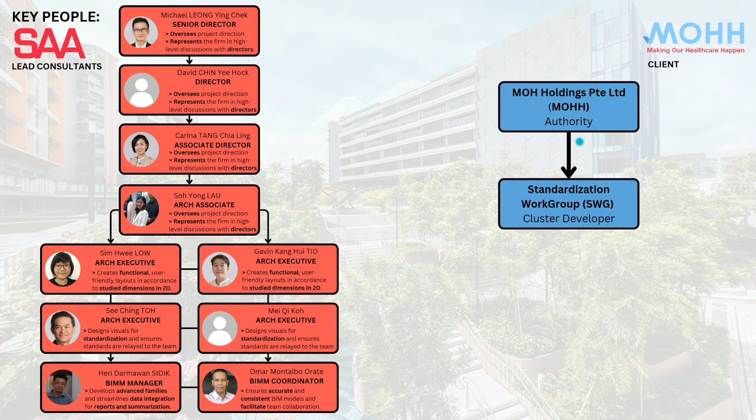As for the clients, we discuss the project timeline with the lead consultant. Considering multiple phases, these are the three key milestones: approval from the authority, review by the cluster developer, and finalization with the future developer.

In summary of the project tasks completed for standardization, firstly, under MOHH, we are tasked to extract out the different BIM models provided by various contractors through reference to Woodlands Health Campus with all the documented equipment.

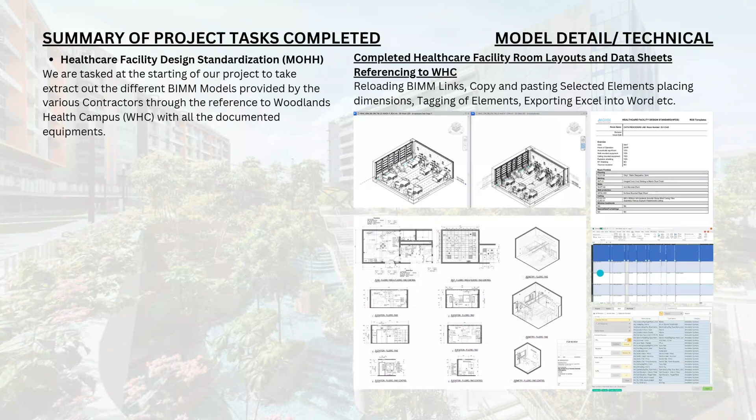This includes completing the room layout and data sheets referencing Woodlands Health Campus, utilizing different technical knowledge and additional plugins to increase efficiency, and creating an overall door schedule for different rooms, contributing to the master schedules.

With all the existing equipment in Woodlands Health Campus, I assisted the BIM manager in consolidating door schedules from Revit files into an Excel sheet, aligning with door code standardization, which will eventually be used for tracking and verifying room changes in later project phases through various discussions.

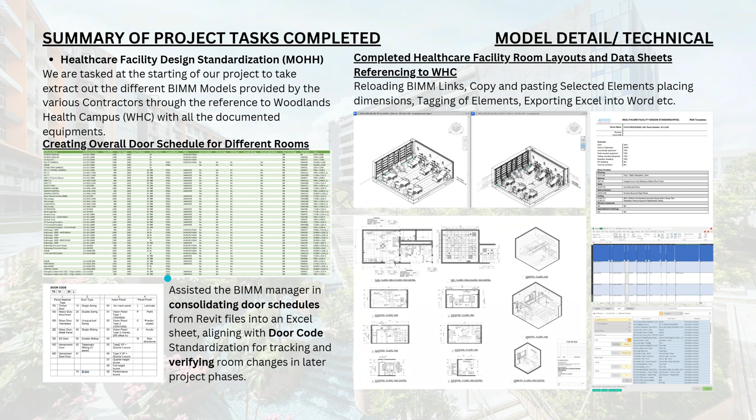After addressing MOHH's requirements, we move on to addressing the three cluster comments from each respective doctors and nurses. The three clusters being National Healthcare Group, SingHealth, and National University Health System.

Firstly, cluster comments were provided and consolidated by us. We then discuss with MOHH by providing them with different options in order to see which layout will be able to address most of the cluster feedback.

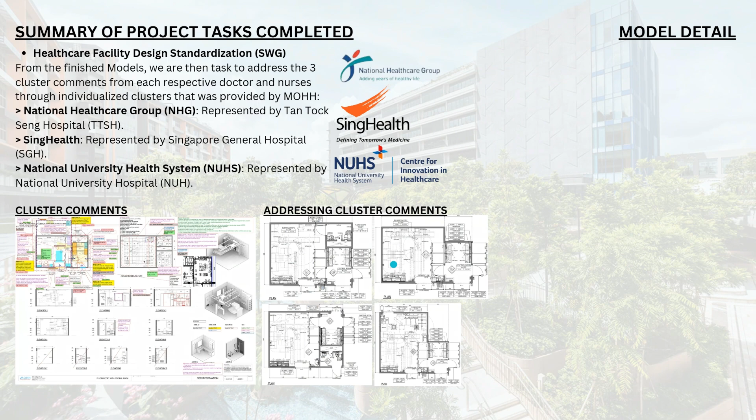And finally, we'll be presenting to the SWG regarding the key comments we have observed from the cluster comments, followed by our major changes.

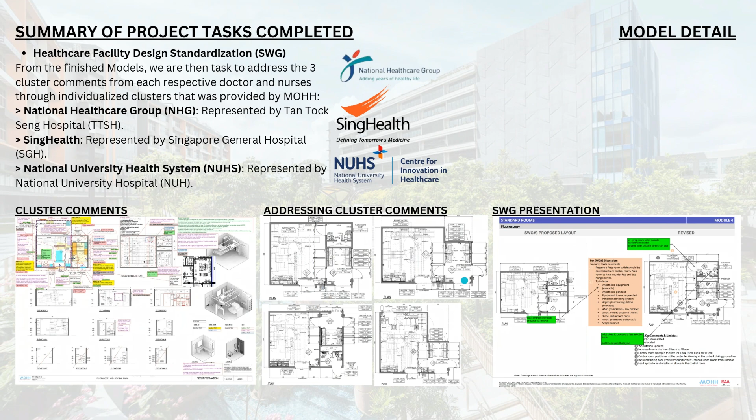At the same time, we need to adhere to each standardization provided by us. Since my internship did not cover the SWG phase, I focused on key standardization theories in hospitals that stood out to me. Firstly, the door usage in hospital facilities.

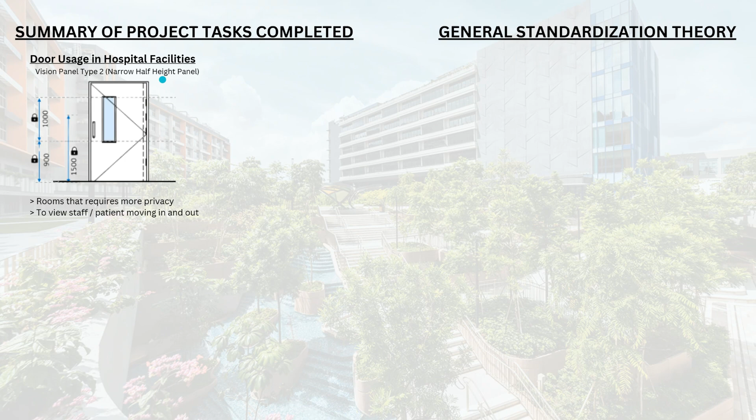Vision panel type 2 is used in rooms requiring privacy but allowing visibility in movement, such as Class A 1 bedrooms, while Vision panel type 3 is used in high traffic areas which require more monitoring, such as Class A ISO-B isolation ward for infection control.

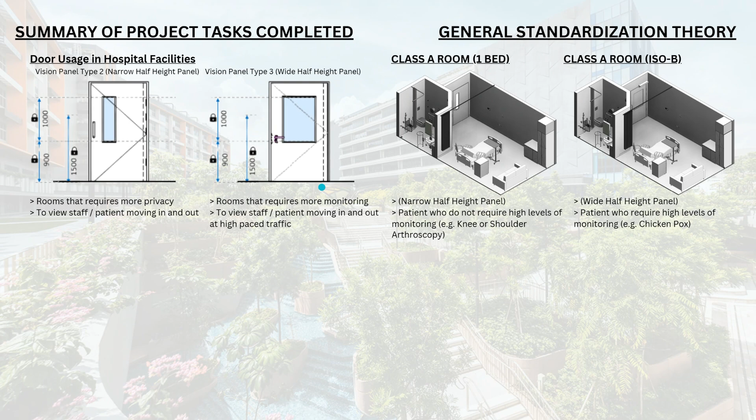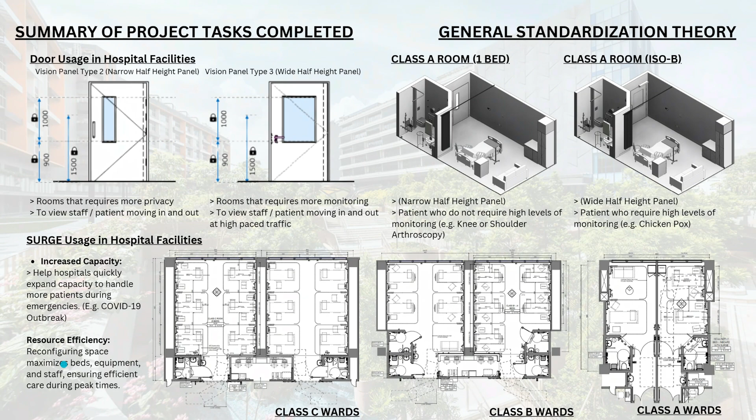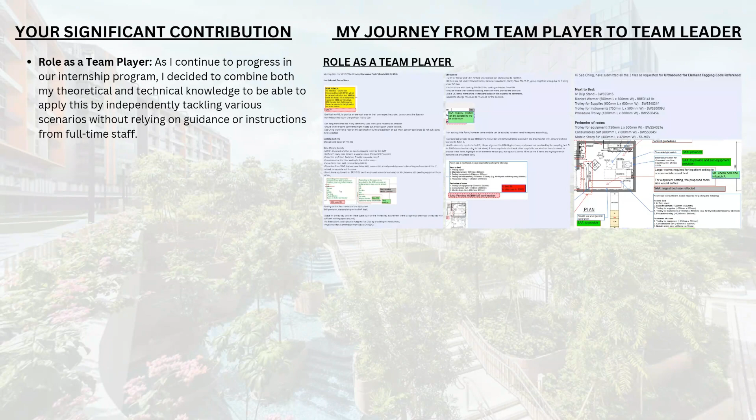My significant contributions include, as for my role as a team player, as I continue to progress in our internship program, I decided to combine both my theoretical and technical knowledge to apply this by independently tackling various scenarios without relying on guidance or instruction from full-time staff.

And my role as a team leader, as I continue to build trust and gain validation from my team, I'm able to effectively motivate, guide, and support them. I focus on providing mentorship, convenience, and specialization to ensure we maintain high quality of work and consistency across all of our assignments.

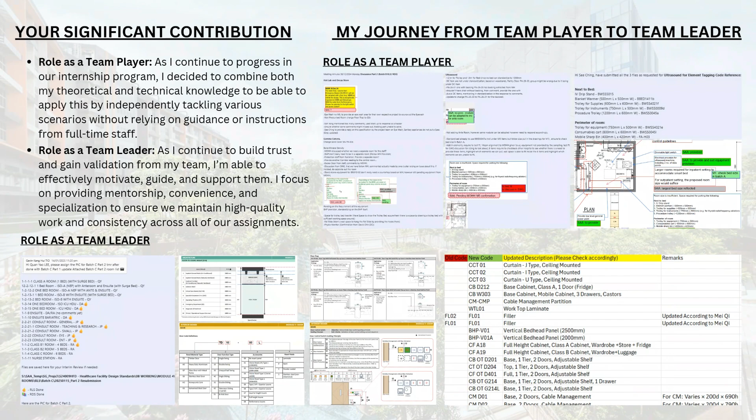During my internship, I gained a deeper understanding of standard drawing, how contractors sync Revit models for accurate documentation, and the role of past projects in standardization. I improved my technical skills in Revit, AutoCAD, and Excel, enhancing my grasp of line weights, annotations, and documentation.

Working in an MNC exposed me to structured roles where I learned to motivate teammates and foster a supportive work environment. I also realized that even experienced full-timers may not always have the right answers, reinforcing the need for critical thinking and initiative in decision making.

I enjoyed how our team stayed connected despite being physically separated, thanks to my supervisor's effort in team bonding and reflection during the hospital standardization project.

Furthermore, my team's support during overtime went beyond tasks. They shared industry insights, career advice, and encouragement. Their informal conversations also made it easier for me to engage, ask questions, and learn beyond my role.

Some challenges I encountered: firstly, at the start of my internship, I struggled to keep up with tasks and felt pressured as the slowest in the team.

However, eventually, I shifted my focus to trusting the process, gaining confidence in my abilities, and embracing challenges with a clearer perspective. This helped me learn from my mistakes and refine my skills without unnecessary pressure.

Additionally, I initially had trouble adapting to the work environment compared to other interns. However, eventually, I improved my eating habits, choosing water and fruits over unhealthy snacks, while also adjusting my sleep routine. This helped me feel less fatigued and more focused at work.

Throughout my internship, I grew from a passive team member to a proactive contributor, gaining a deeper understanding of hospital layouts and how each facility's design is shaped by architects based on doctors' and nurses' feedback.

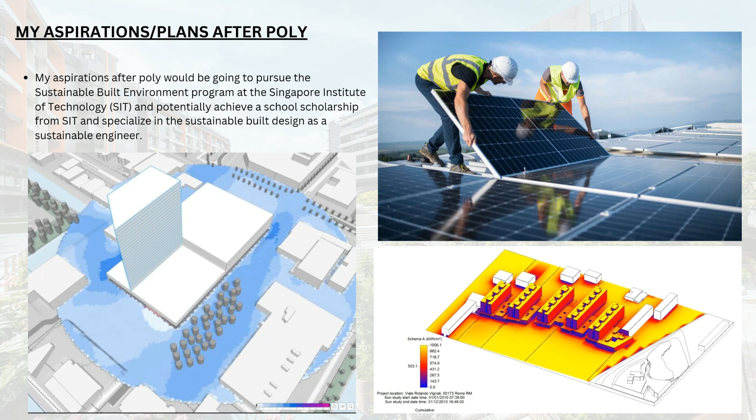In the future, my aspirations after poly will be to pursue the Sustainable Built Environment program at the Singapore Institute of Technology, and potentially achieve a school scholarship from SIT and specialize in sustainable built design as a sustainable engineer. And now we have come to the end of the healthcare facility design standards for my internship presentation.